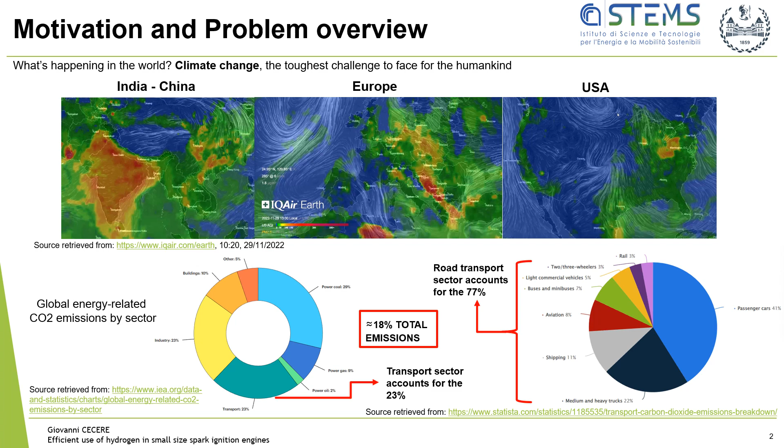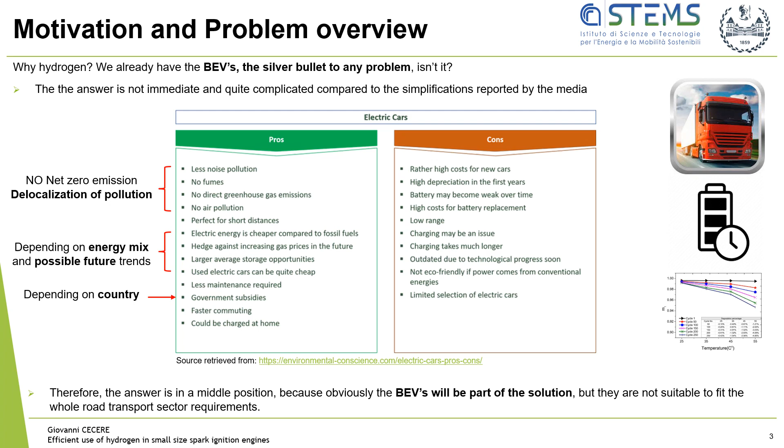So why study other solutions if we already have battery electric vehicles? The answer is linked to the structural problems and intrinsic weaknesses which make this technology poorly suited to satisfy the entire road transport sector requirements. Thus, in this scenario, the use of hydrogen in internal combustion engines can represent an intermediate and attractive solution towards the zero emissions target.

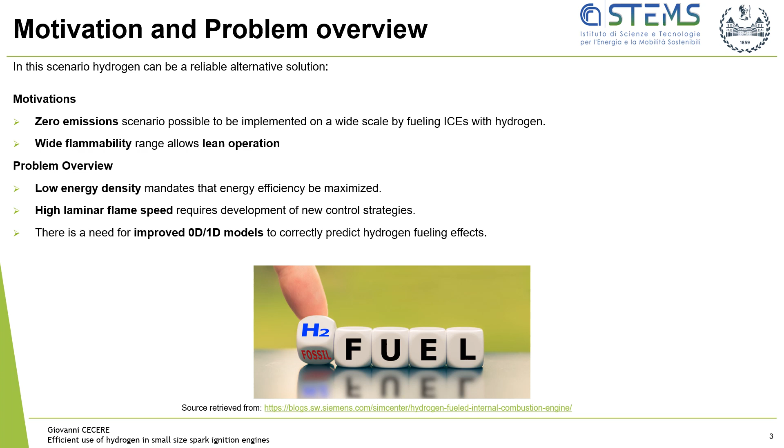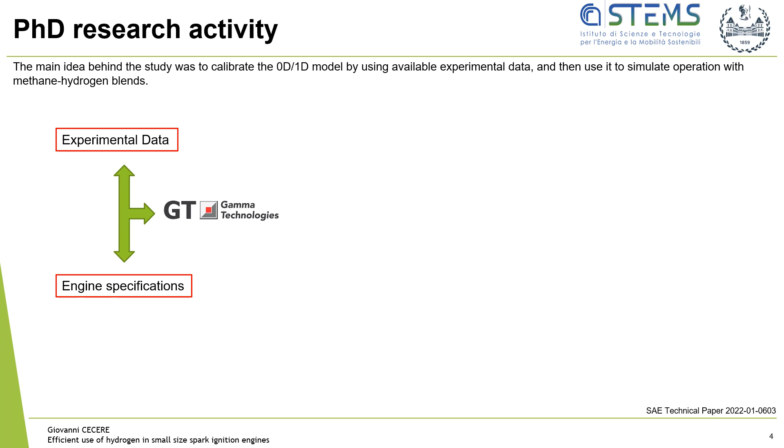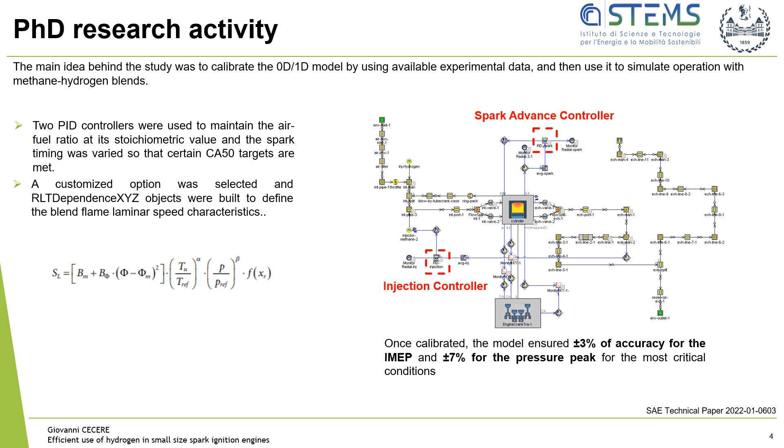In my first year of research activity, starting from the experimental data and engine specifications, my research group and I developed a 0D/1D model to allow the simulation of hydrogen operations, with particular attention to the calibration phase and definition of combustion characteristics.

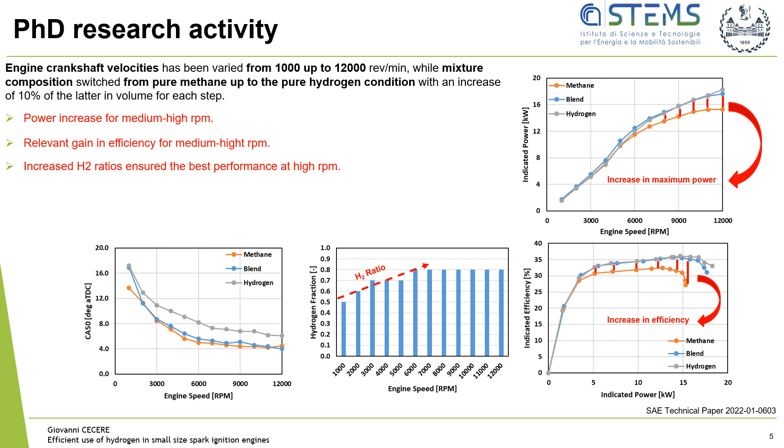The addition of hydrogen showed several advantages at medium-high speeds, with relevant gains in terms of indicated power and efficiency, and in order to adapt the flame front speed to the higher crankshaft velocities, the optimal hydrogen ratio increased with the engine speed. Moreover, it is also important to note how the methane and blend fuel modes showed similar crank angle degrees at which 50% of the mass fraction burned was achieved, thus highlighting the few modifications needed for the addition of hydrogen.

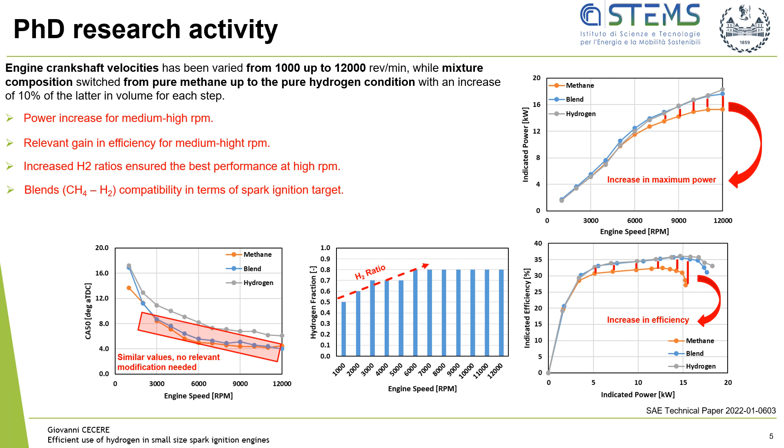On the other hand, this investigation also revealed some critical issues. First of all, theory suggests that the pressure peak should be located around 16 degrees after TDC, thus losing a part of the gained efficiency. Moreover, at low speed, the pure hydrogen fuel mode showed a critical pressure gradient, thus limiting its addition to lower ratios or higher engine speeds.

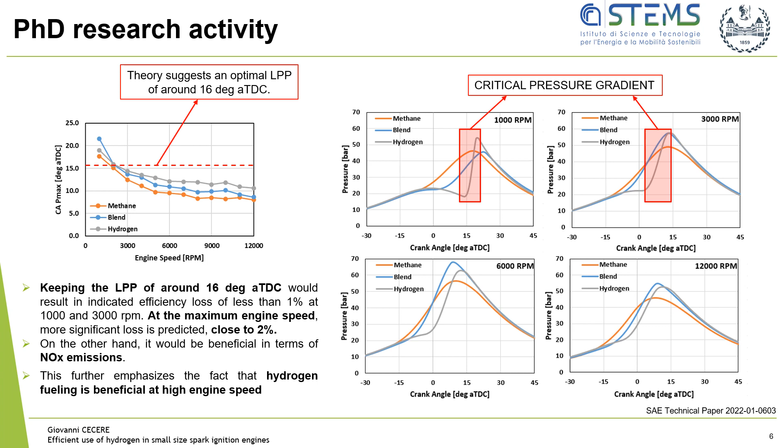For my second year, further analysis on a more extended load map is expected, coupled with the experimental analysis of the hydrogen fuel jet during my period abroad.